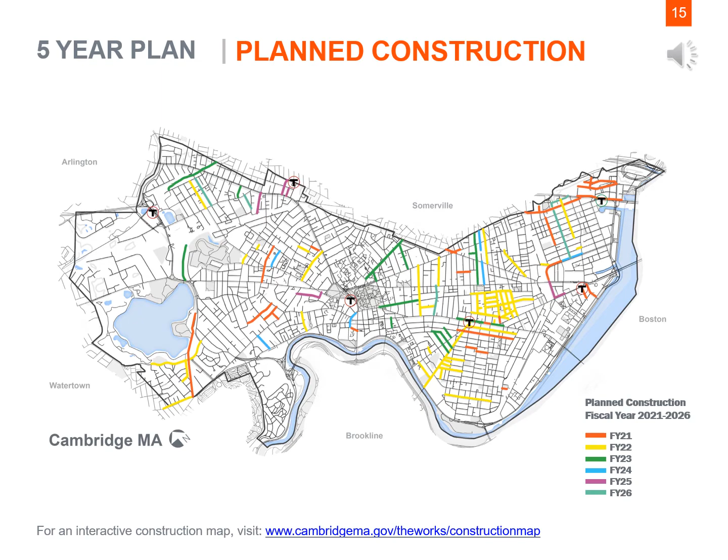There are many guiding plans and policies that help steer our work. Some include the Americans with Disabilities Act. The Americans with Disabilities Act was signed into law on July 26, 1990 by President George H.W. Bush. The ADA is one of America's most comprehensive pieces of civil rights legislation that prohibits discrimination and guarantees that people with disabilities have the same opportunities as everyone else to participate in the mainstream of life.

Next, the Pedestrian, Bicycle, and Transit Plan. This plan emphasizes improving comfort, safety, and operation for sustainable modes of transportation. Their goal is to provide a transportation system that is sustainable and efficient and moves people safely. Lastly, the Cambridge Climate Plan and the recently completed Urban Forest Master Plan document our commitment to maintaining a healthy environment in the face of a changing climate.

So how do all these plans and policies translate to specific street and sidewalk design? Let's go through some of them, starting with accessibility. Both federal and state regulations cover the construction of sidewalks and require newly constructed sidewalks to be accessible. The goal of the city's bicycle plan is to enable people of all ages and abilities to bicycle safely and comfortably throughout the city. The designs are developed as part of a specific street design project, like the one we are doing right now.

The city does not control the MBTA system, but we can make improvements during our projects to improve accessibility of bus stops and improve access to bus systems. Street trees are an important element of our projects. We need to ensure that any proposed street tree does not compromise the accessibility of the sidewalk.

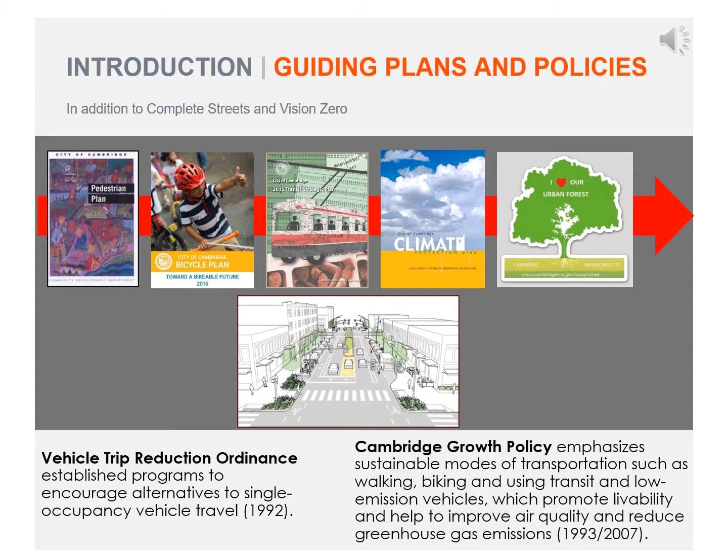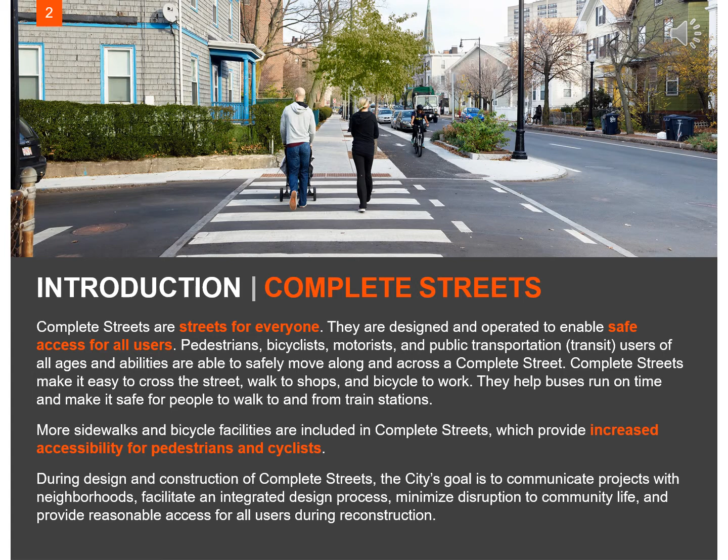The Massachusetts Department of Transportation Complete Streets Program. A complete street is one that provides safe and accessible options for all travel modes, walking, biking, transit, and vehicles, for people of all ages and abilities. Vision Zero. Adopted by the City Council in 2016, Vision Zero calls for the elimination of fatalities and serious injuries resulting from traffic crashes.

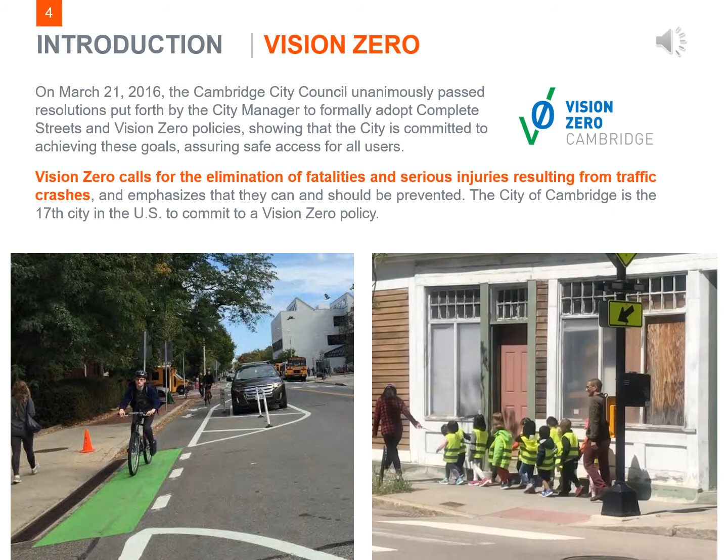This slide also shows some of the typical tools we use on narrow residential streets. In regards to sidewalk access, when it's not possible to get the required sidewalk clearance, which is 36 inches, on the house side of a large tree, we can interrupt the parking lane and provide a sidewalk on the street side of the tree to make the sidewalk accessible.

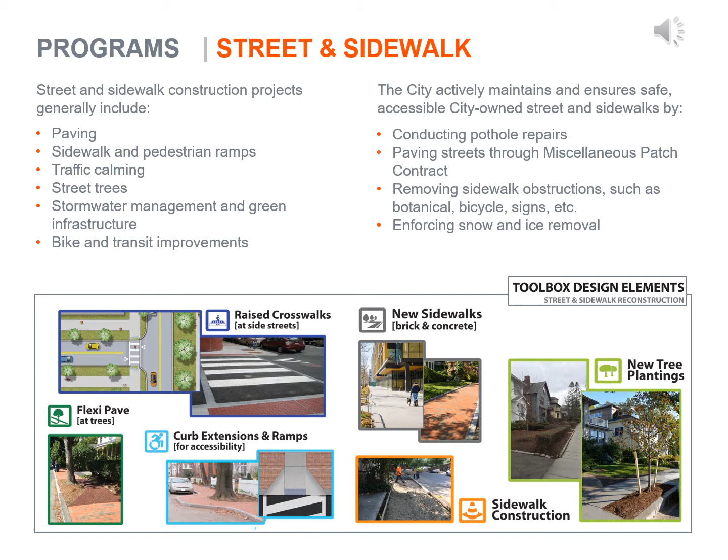At tight intersection corners where it's difficult to fit in a typical pedestrian ramp, we can construct a modified raised crosswalk. This has the advantage of eliminating the need for pedestrians to ramp up and down, and also has the benefit of slowing vehicles as they turn in and out of residential streets.

Our policy is to replace sidewalks in kind with the same material, although we do contact property owners to see if they would like a change. We also give special consideration to materials when a project is in a historic district, or if it's a larger project along one of the city's main corridors, where a more uniform approach to materials may be advisable.

When brick is used, our standards call for replacing older molded brick, which has uneven shapes and wide joints, with more uniform wire cut brick which fits together tightly.

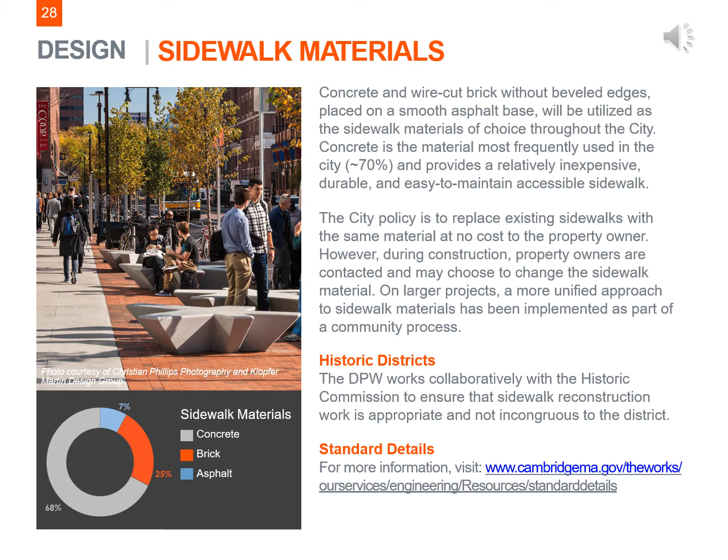Green infrastructure, or GI, is a part of our effort to improve the quality of stormwater before it is discharged from the local drain pipes to the Charles River or Alewife Brook. GI refers to a variety of techniques which use natural processes such as selected plants and soils to promote infiltration of stormwater into the ground, or to remove pollutants such as phosphorus from stormwater.

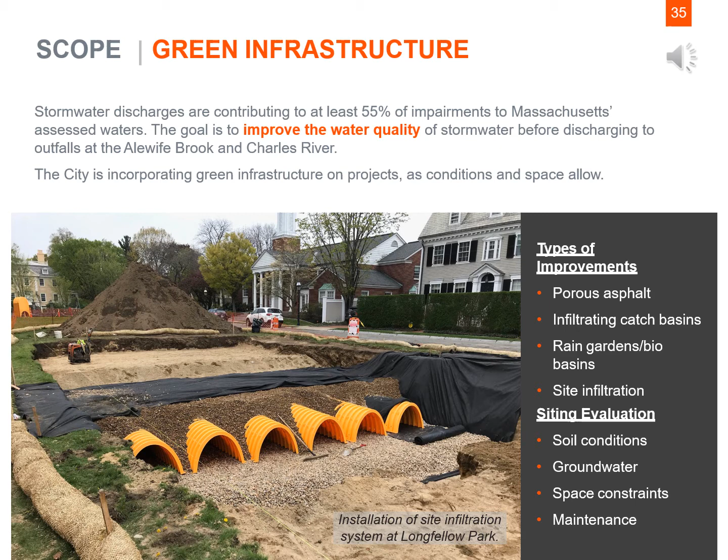The city has successfully implemented GI in a variety of roadway projects ranging from major corridors to residential side streets. We are committed to incorporating these types of environmental improvements into smaller projects as conditions and space allow.

Design bike facilities. The goal is to enable people of all ages and abilities to bicycle safely and comfortably throughout the city. The plan provides a framework for developing a connected network of complete streets, but does not provide specific designs for individual streets. The designs are developed as part of a specific street design project.

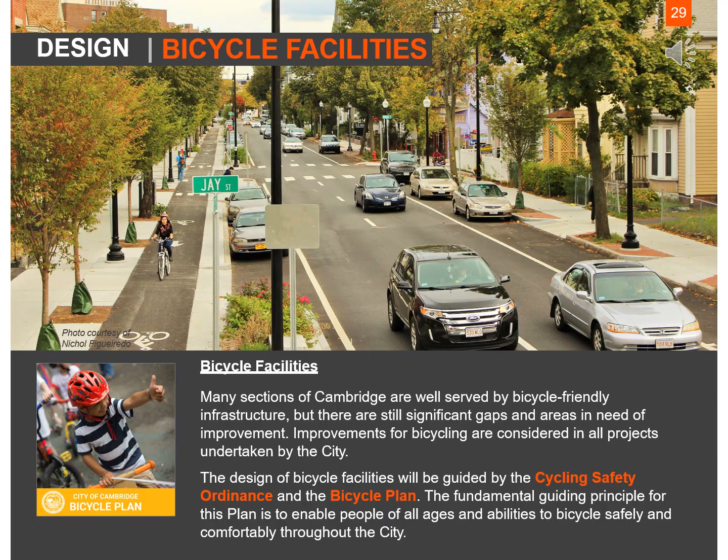Transit. The city doesn't control the MBTA system, but we can make improvements in our projects to improve accessibility at bus stops and improve access to bus systems. We want to emphasize that we are committed to improving transit access and accessibility of transit.

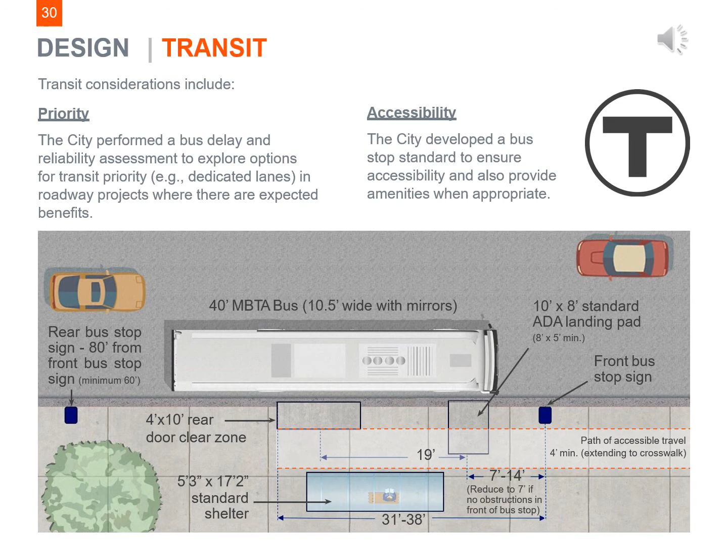Street trees are an important element of our projects. We place a great emphasis on protecting existing street trees during construction, and we look for opportunities to plant new trees where possible. On narrow streets like the one in this project, finding additional tree locations can be challenging. We need to ensure that any trees do not compromise the accessibility of the sidewalk and do not interfere with overhead wires. The city arborist will review the streets for this project to identify possible locations.

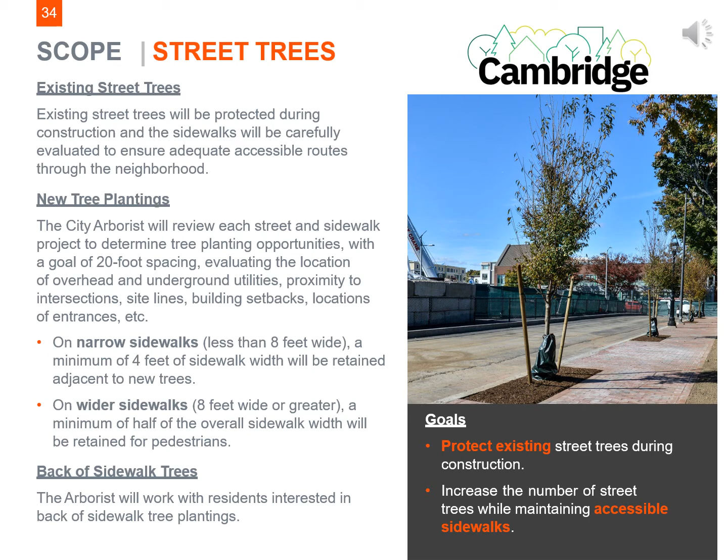The arborist will also work with residents who may be interested in our back of sidewalk tree planting program. In this program, the city offers to plant trees at no cost on private properties, where conditions are often better for tree survival. No matter where trees are planted, they are planted according to our updated specifications, which include a much greater volume of planting soil per tree, including beneath adjacent sidewalk. New trees are also watered regularly for the first 2 years by the contractor.

Construction is understandably what residents and businesses are typically most concerned about. Construction is disruptive. It's loud, sometimes messy, and frustrating, but the city is committed to working with residents and businesses throughout construction. Each project is assigned a project manager and a community relations manager. That team works together to ensure that there is clear communication about what to expect and when.

Projects in the city have a standard work hour of Monday through Friday, 7 a.m. to 4 p.m. We expect our contractors to implement and maintain safe and effective traffic management plans to assist pedestrians, cyclists, and vehicles throughout the project area.

This project is in the early planning stages, therefore a detailed schedule has not yet been developed. The next step is to hold a second community meeting once conceptual design plans have been established. At that time, residents will again be asked to provide feedback. The city values feedback from those who experience the street on a daily basis.

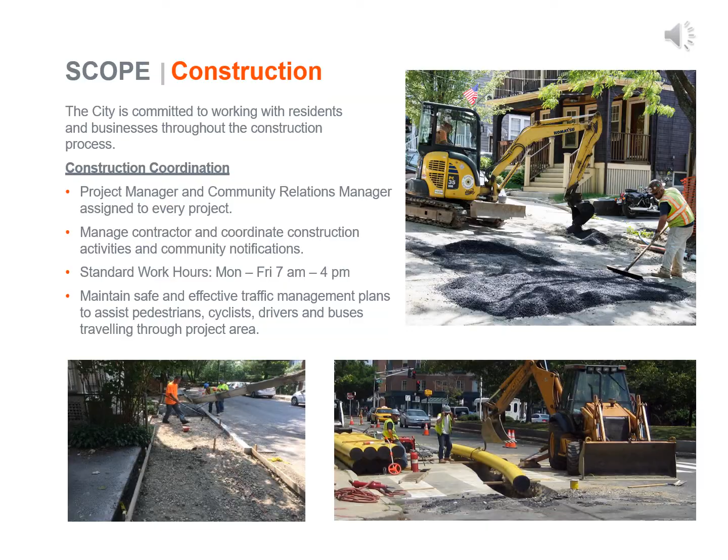After viewing this presentation, please send all comments and questions ahead of the October 6th virtual meeting to Kate Riley at kriley@cambridgema.gov. There will also be time for comments at or after the October 6th meeting.